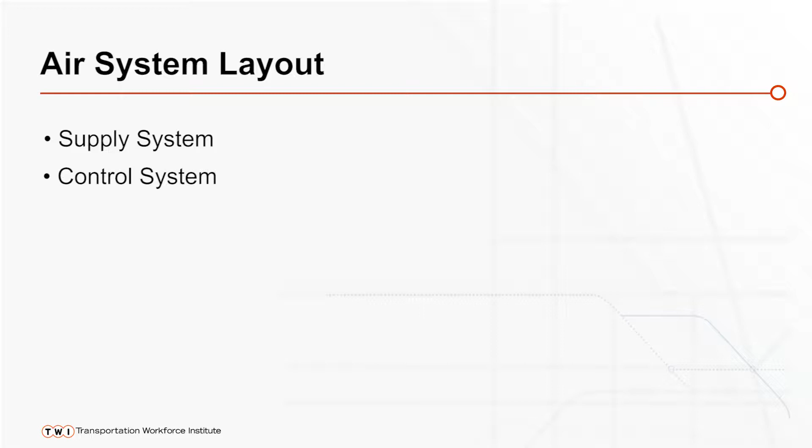Shop tip. Always remember, and this is the most important part of any air system troubleshooting or any brake system troubleshooting, air leaks are the root cause for the majority of air system problems. Anytime you've got a problem, always look for air leaks. That's your number one problem. Air leaks are really commonly overlooked. The condition of the supply system will indicate the health of the complete air system. A dirty supply system will result in a problematic control system. You have to make sure the whole system is in good leak-free condition.

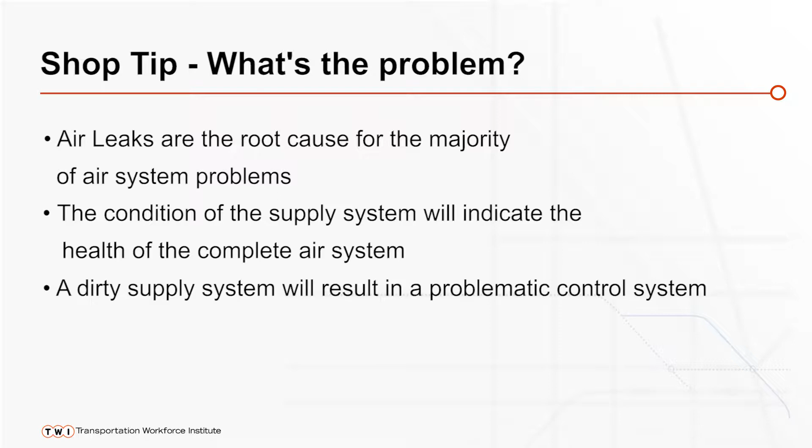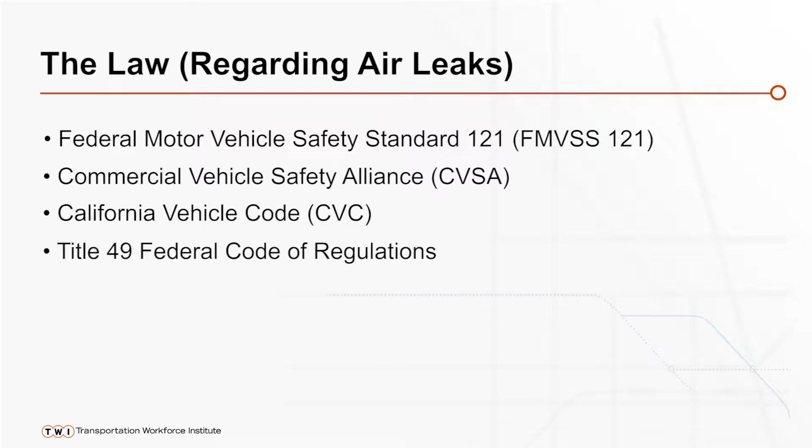We need to just kind of highlight a few things when it comes to the air brake system that are related to the law. We have the Federal Motor Vehicle Safety Standards, referred to commonly as FMVSS 121. Commercial Vehicle Safety Alliance, CVSA, that's your out-of-service criteria, officially known as the North American Commercial Vehicle Safety Alliance Uniform Out-of-Service Criteria. California Vehicle Code, CVC, that's state-specific. Then we have Title 49 of the Code of Federal Regulations that tells you the stopping and all the related requirements for a vehicle in the United States, and Title 13 of the California Code of Regulations, which refers to different sections such as air leaks and things like that.

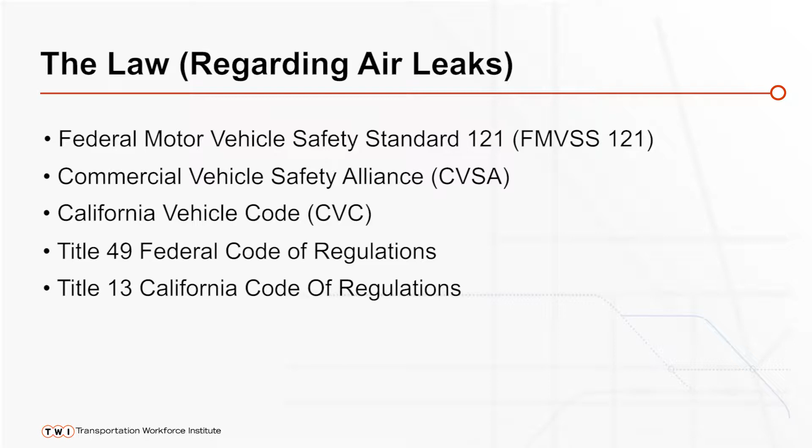Static air loss is when the service brakes are released and the parking brake is fully applied. That is when the service brake chambers have no air in them and the parking brake or the spring brakes are applied with the spring and have no air in them. Applied air loss is with the service brake fully applied and the parking brake released. Static air loss is a maximum of 2 psi per minute. Applied air loss is a maximum of 3 psi per minute.

Now remember, all brake valves and systems leak air. That's just the nature of the air brake system. But air loss in excess of 2 psi per minute static or 3 psi per minute applied is a violation of the Code of Regulations, which will result in a citation for improper maintenance. Actual out-of-service air loss rates are much greater. We want to keep all air loss to an absolute minimum. But sometimes you'll hear little tiny leaks at different valves and connections, and that is acceptable as all brakes do leak a certain amount of air.

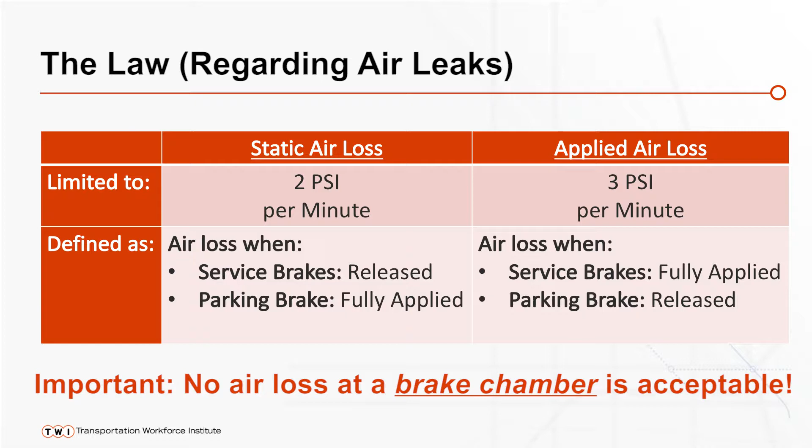But it's important to understand, no air leaks at a brake chamber are considered acceptable. Air leaks at connections and valve exhaust ports are acceptable. Air leaks at brake chambers, as I previously said, are in violation of CVSA out-of-service criteria and must be corrected prior to the vehicle being placed back into service. The difference on a brake chamber is if a brake chamber is leaking air, it's impossible to determine if the diaphragm is ruptured or not. Good example is if you do have a leak at a brake chamber, it's out of service, you tighten the clamp, it's no longer leaking, it's now back in service. But anytime a brake chamber is leaking air or there's any leaks at the brake chamber, the vehicle is out of service until the leak is corrected.

With the service brakes fully applied, 90% of the air pressure in the brake reservoir must be available at the brake chamber. You can reverse this number and think that the air brake system uses a maximum of 10% of the brake reservoir pressure during a full brake application. This is great for troubleshooting because all you have to do is have your air gauge on the dash at 100 psi, make a full brake application, and the needle should fall to no more than 90 psi.

That indicates that we've used 10 psi to fill all the air lines, the brake chamber diaphragm, the valves, and so on. If the needle falls below 90 psi, that indicates we've used more than 10% of the available air in application, and we have less than 90% of the air in the brake reservoir available for braking action. A lot of times this is a good indication of reduced reservoir volume, which is a direct result of contaminants in the reservoir. If the reservoir has not been drained on a regular basis, then you'll find you'll use more than 10% of the pressure in the reservoir during application. You'll have less than 90% of the pressure in the reservoir at the brake chambers.

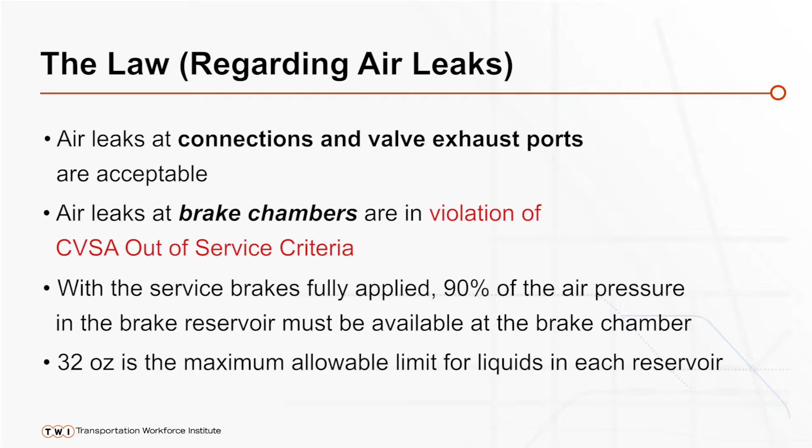32 ounces is the maximum allowable limit for liquids in each reservoir. 32 ounces. Remember that and drain reservoirs frequently.

Supply system. The supply system conditions and stores the compressed air, which is the medium of control and power of the vehicle's braking system. The air supply subsystem is basic to all vehicles. The control system can vary from vehicle to vehicle. If you look at any of your supply systems, you'll find they always have a compressor, a governor, a dryer, reservoir, and different valves. They're basic to all vehicles. The control system, on the other hand, uses different valves to perform different functions.

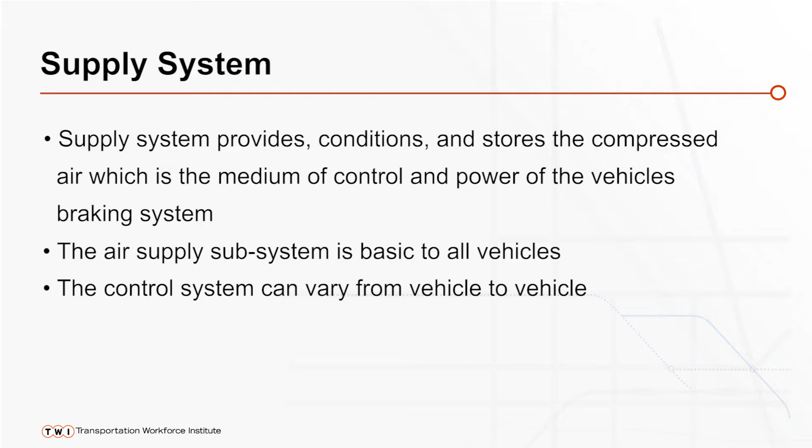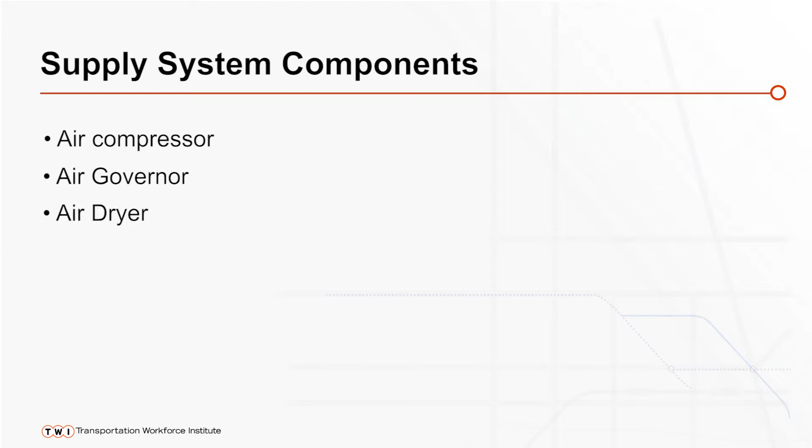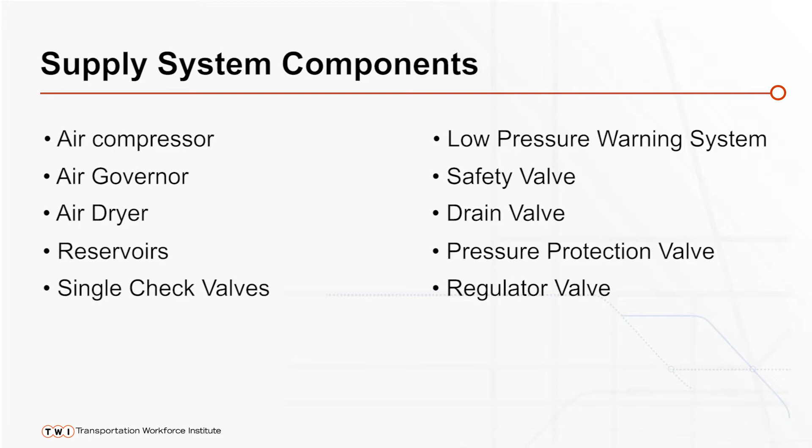Supply system components. Here's an example of some of the different components that are in the supply system. We have the air compressor, the air governor, air dryer, the reservoirs, single check valves, a low pressure warning system, safety valve, drain valves, pressure protection valves, regulator valves. Those are all just an example of the supply system components.

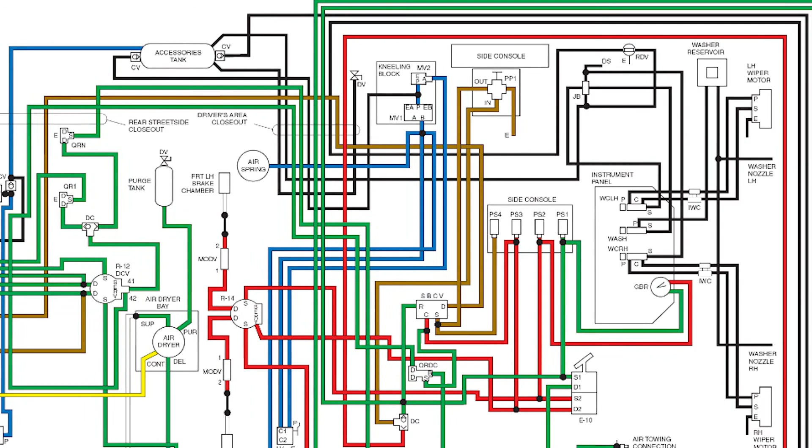Air tubing and line colors. Transit buses are unique from over-the-road trucks, and you have to consider the air tubing and line colors as a schematic. It's divided into 6 different colors common to transit bus. Green is the supply and primary brake system. Red is going to be your secondary brake system or the front brakes. Brown is your parking or emergency system, which is actually your spring brakes. Yellow is governor control circuit. Black is your accessory system and suspension system on some buses, depending on the manufacturer. The suspension system is typically blue on some buses, or it could be black.

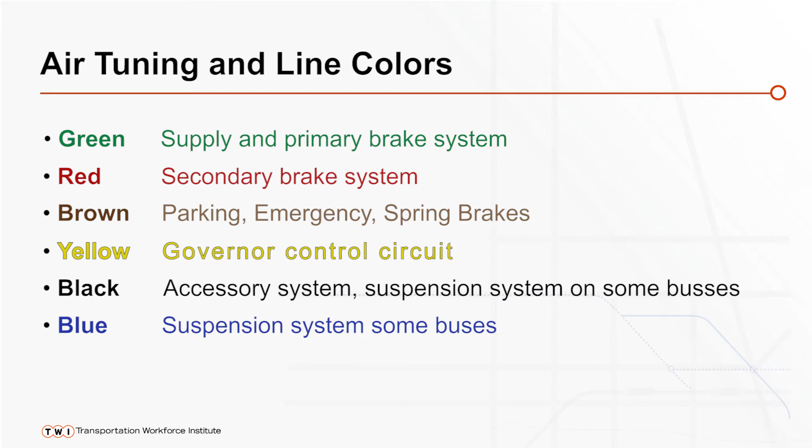The important thing here is not to mix the colors up, and it's great for troubleshooting. When you look at a valve or you are troubleshooting, the system is laid out for you just like a wiring schematic. Green, supply primary brakes. Red, brown, yellow, black, blue. They're all indications of what the lines are supplying or transporting air for operation. Keep in mind that the different colors should never be mixed up. When you're troubleshooting your rear brakes, look for the green air line. Front brakes, look for the red, and so on.

Now, air lines, for all they do have an outer color, like I just said, green, brown, red, yellow, they also have a white inner layer, so they're 2-ply. It's generally acceptable for the outer color or the outer ply to have some scratches on it. That's not a big concern. If the outer color is worn through, exposing the white inner core, then the line is compromised and must be replaced. When you replace an airline, the generally accepted policy in the industry is to go with the same color, always the same size line that is in the existing system.

Now, sometimes you don't have that color. The accepted practice, but try to avoid this and stick with the same colors, is you can use black in place of any of the colors. But although you'll clear the bus for service, you'll make it more difficult for troubleshooting in the system. If you're looking for a green line and somebody's replaced it with a black line, then you're probably going to overlook that line. On the other side, if you're looking for a green line and somebody put a red line in, then you've got it confused with a completely different air brake system. In other words, you're looking for the rear and now it's identifying itself as the front brakes. That's going to create a lot of problems. Try and stick with the same color and definitely stick with the same line, size, and routing.